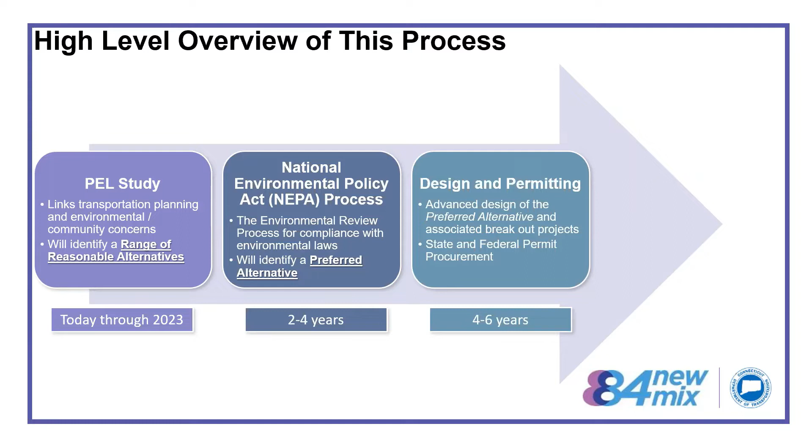Through that process, we will identify a preferred alternative. That is about 2 to 4 years. After we identify that preferred alternative, we can get into the design and permitting process, where we have advanced design of the preferred alternative and procure state and federal permits. That's about a 4 to 6 year process for the long-term project.

And then finally, construction is anticipated to be completed in 2045. The construction, as mentioned before, is broken down into phases, and we'll explain that again in the next couple of slides. That construction is anticipated to be completed in 2045, and that would be for the long-term project for the new mix.

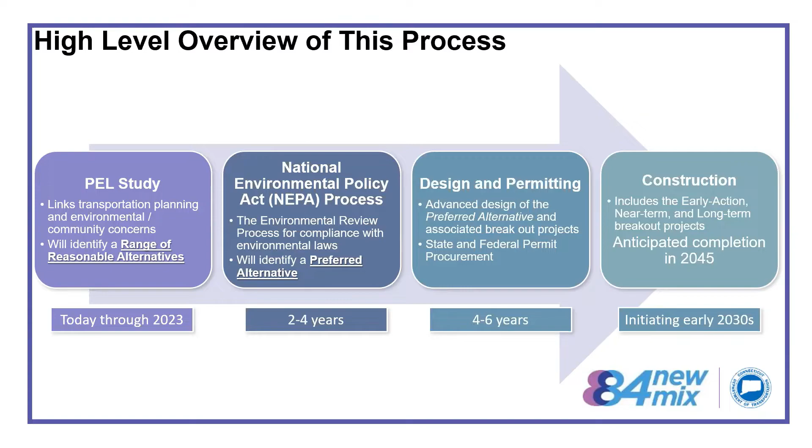I do want to stress that public involvement will occur throughout all phases. We are just now in this very early PEL study process, but each step of these phases will include and incorporate public involvement, public information meetings, where members of the public will be able to provide additional input and perspective on the preferred alternative or the design and other aspects of the project whenever it's identified. And with that, I'll hand it over to Jake.

All right, thanks, Naomi. Let me jump to the next slide. So we're going to be talking about today mainly the proposed early action projects. These are the enabling type of projects that will help improve local connectivity, improve traffic conditions on not only the local roadway network, but as well as the highway network. They're independent type projects that we've identified, and I'll explain how we came up with those, that we can initiate and start well in advance of the long-term timeline of the full replacement.

It's going to help enable, as I said, these are enabling projects, but propel and make the full construction easier. And as a reminder, what we're talking about amongst all these three is the near-term projects become those projects that we can do in advance, but the NEPA process has to be completed before we can move those forward into construction. Obviously, the long-term project is a full-blown replacement of the full interchange system.

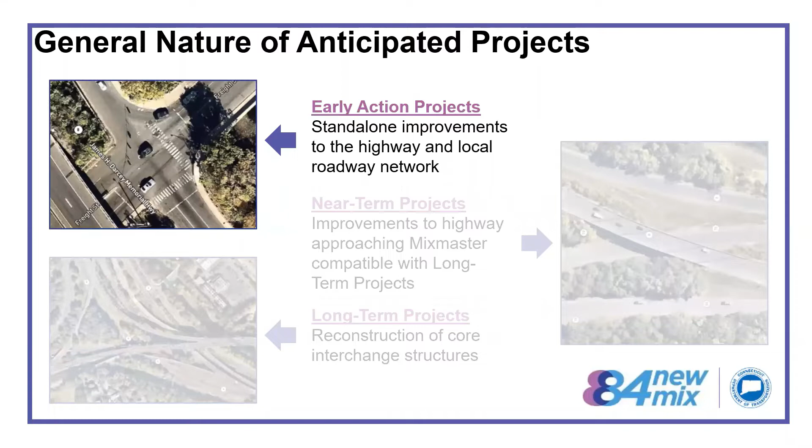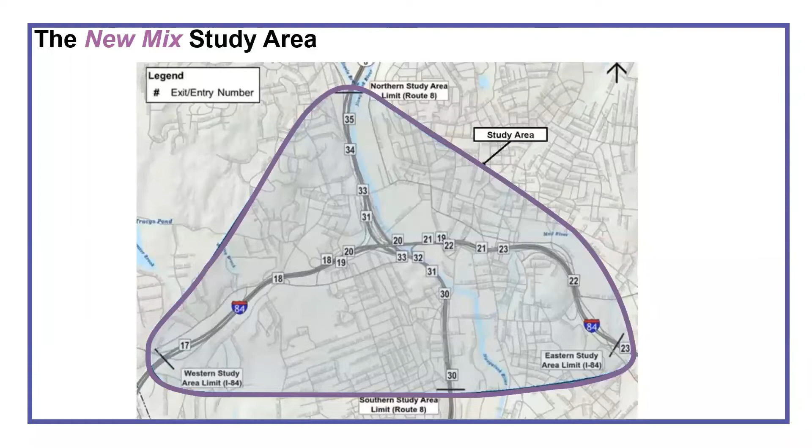So let's talk about how we arrived at the opportunities for these standalone early action type projects. We looked at the entire study network. We evaluated the traffic and saw that 35% of the volumes were jumping on and off the highway, not exactly the way the system was originally designed for. But we also looked at the roadway network, the local roadway network, and the arterials leading in and out of the highway as well.

So they created this hotspot map. You can see from the legend on the side that color-coded in green meant that things were functioning well. If they were that dark red, functioning at a level of service of F or E, anything in red or orange were areas of concern, areas that we felt we could make improvements. So we started looking at the potential solutions and the value these would bring to the overall interchange and a way to propel the project forward and help enable the long-term reconstruction of the interchange.

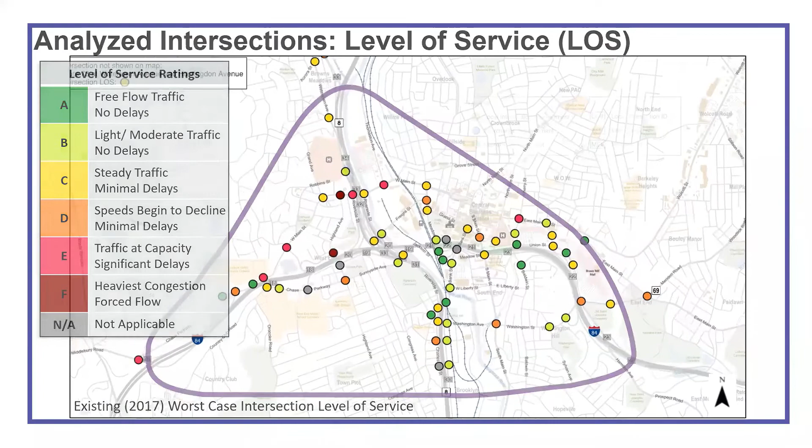So we broke them into 3 categories: the local intersection improvements, the interchange improvements, and the main line improvements that we saw as great opportunities as standalone projects that could be incorporated, some as early as today, but they're all in a very short, near-term time frame. We don't have to wait for NEPA to be completed. They're good standalone projects, and we can move forward with these. So David's going to walk you through these in a little bit of detail about each one. I'll turn it over to David Schweitzer.

Thank you, Jake. All right, the first one we're going to talk about, well actually the first two that we're going to talk about are actually getting included within the rehab project.

The first one we're going to talk about is ML5. This is a mainline improvement that happened to be numbered number 5. I believe Ken had brought this up at a previous PAC meeting and we started to discuss it. This is an auxiliary lane on I-84 westbound from the exit 22 on-ramp to the exit 21 off-ramp.

On this slide, you can see the exit 22 on-ramp is to the right side of our screen, while on the left side is the exit 21 off-ramp. I-84 westbound is on the upper half of the slide, while eastbound is on the lower half. The area shown in yellow is the area we'll be looking to reconstruct to put in this lane coming on in westbound.

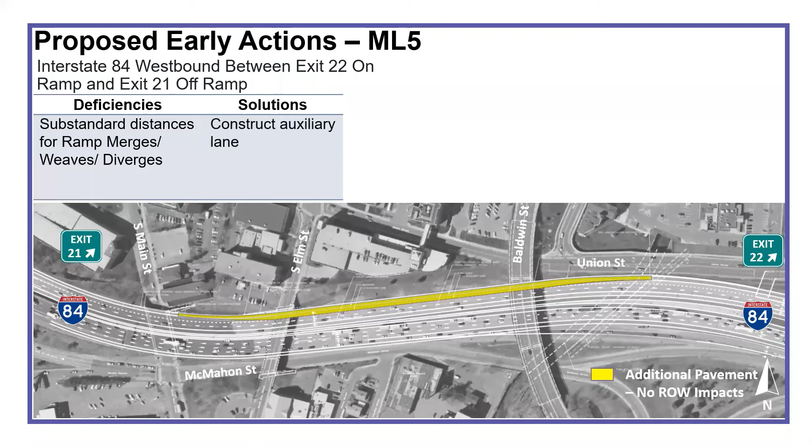This can slow things up during peak hours. So the solution is we'd construct that auxiliary lane, and that will help improve our traffic operations. We'll improve air quality because we'll reduce congestion, and improve safety because we'll reduce the crash rate. It's a low impact solution, and we looked to include this within the rehab project because it was an effective and efficient way to get this project built for the immediate effects it could show, since we already had such a large contractor on site, and this is within the area of the rehab project.

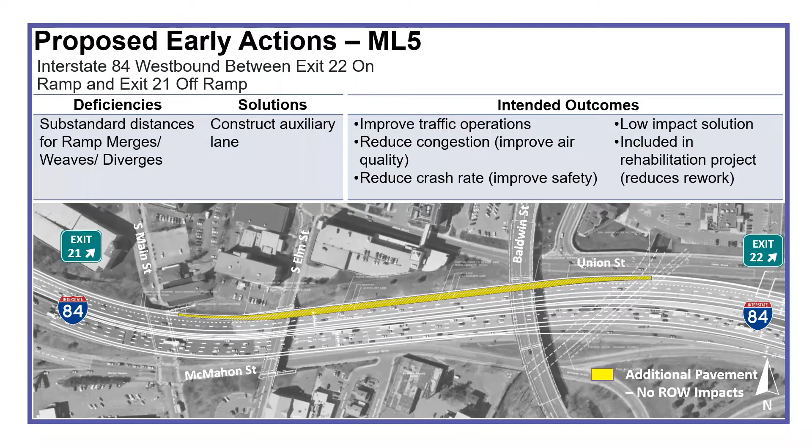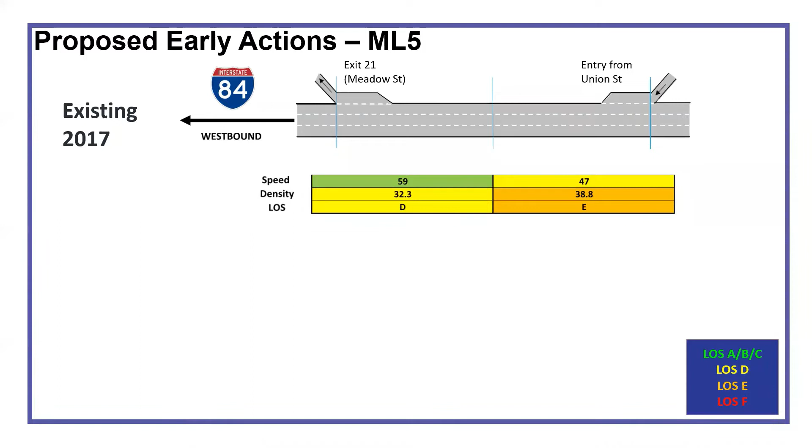What we were seeing was that the merge condition from exit 22, a heavy use on-ramp, is showing us a level of service E. But with these improvements, by extending that auxiliary lane, we're moving this whole stretch up into a level of service C. So that was the goal of this project, to help reduce that congestion along I-84 westbound.

So are there any questions or comments on this proposed early action?

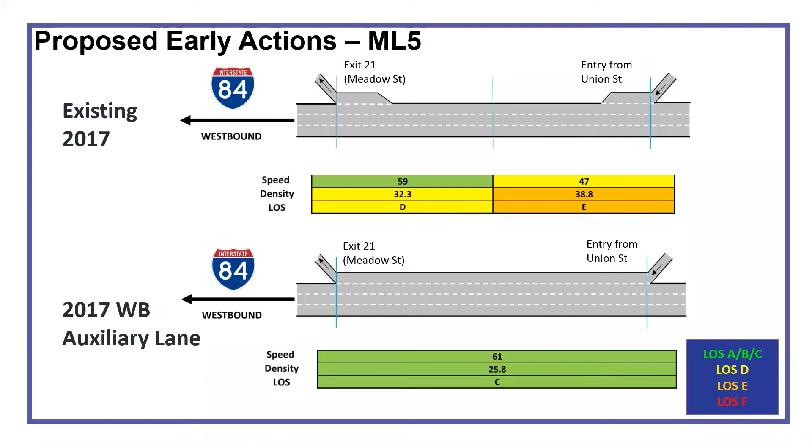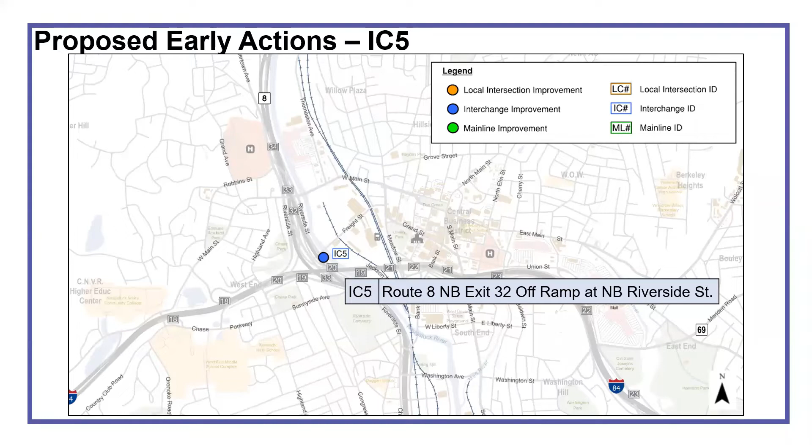The next one is what we called IC5, or interchange improvement number 5. This one also is going to go into the ongoing rehab project, and I'll explain why in a minute. This is the Route 8 northbound exit 32 off-ramp at its intersection with Riverside Street northbound.

As the rehab project has been going on, the temporary bypass for Route 8 northbound, when it crossed the Naugatuck River and came back, actually got within the footprint of Riverside Street northbound before it came back up and re-intersected with Route 8 northbound after crossing Freight Street. So we had to close the exit 32 off-ramp for the last several years. This was scheduled to be reconstructed by the contractor once Route 8 northbound was reopened. So that's the stage we are at.

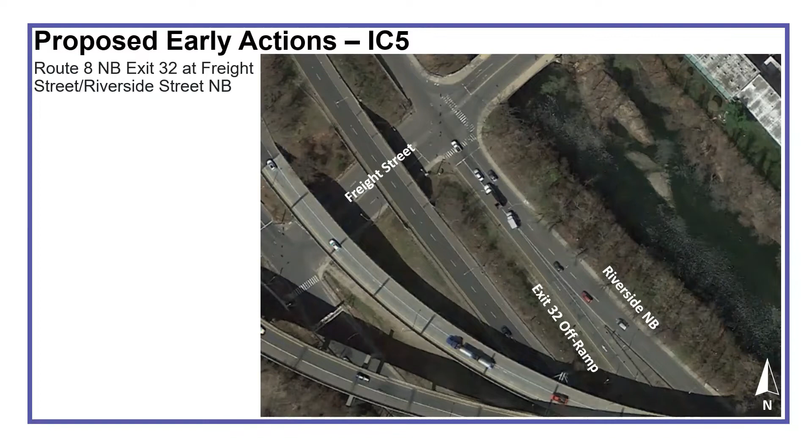But our traffic analysis showed us that we had a high crash location and deficient traffic operations that would actually affect West Main Street. If you look at the top picture, you can see how tight this gore area is to the existing Freight Street intersection.

What is happening is that vehicles exiting off of exit 32 are in a yield condition while Riverside Street northbound is in a free flow condition. So somebody getting off the exit ramp has to maneuver hard in order to, in this short distance, get to the far right lane to turn onto Freight Street.

And this is evident when you look at the bottom picture where you can see these cars already starting to move across the gore area in order to be able to start moving over to that far right lane.

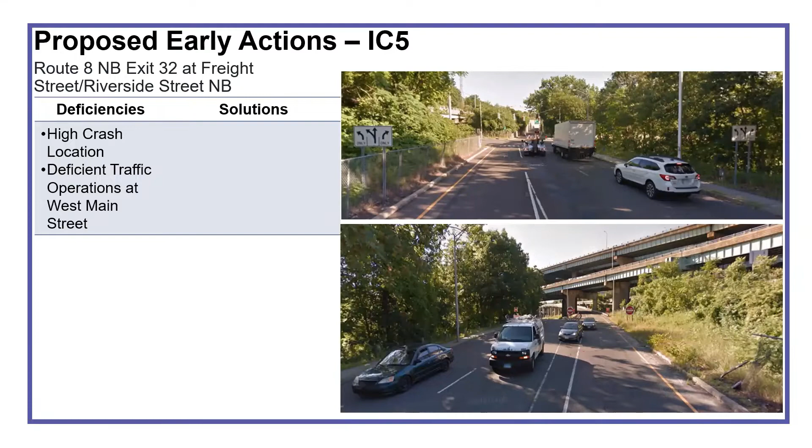So the solution we are looking at here is, there are already traffic signals installed at the intersections of Freight Street with Riverside Street, both northbound and southbound. Those signals are being replaced with the rehab project with a new controller and all new equipment.

So what we are looking to do is get a third signal installed, run off the same controller and synchronized with them at the intersection of the off-ramp with Riverside Street northbound. Then vehicles exiting from Route 8 northbound will be able to get into the lane they want and make the maneuvers they want, rather than being trapped and forced to head further north up to West Main Street, which is already a very heavily trafficked arterial within the city.

So what our outcomes will be is we're going to relieve that pressure on West Main Street, take some of it off, and improve our traffic operations here in this area. When we reduce congestion, we're improving air quality, and when we reduce the crash rates, we're improving safety. This is also a low impact solution.

We did not want to have the rehab contractor finish his work, then identify this problem and come back four years later and start to tear the same intersection up. So we wanted to get that work done now within the rehab project. The rehab contractor is also going to be reconstructing all the sidewalks and crosswalks throughout this area.

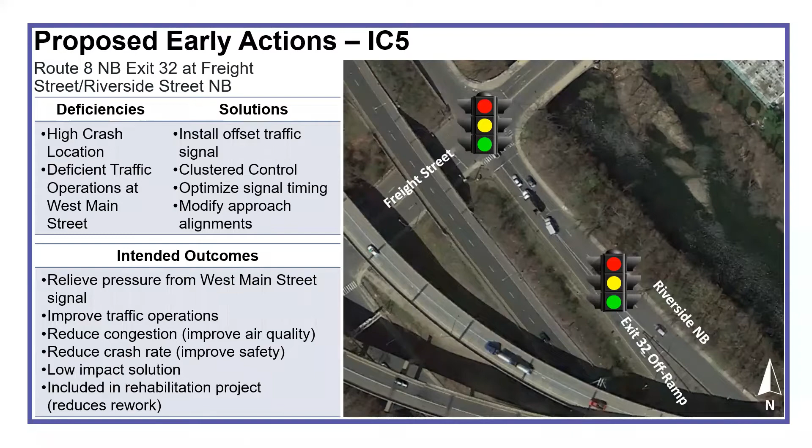Now, those previous two were projects that have been realized, initiated, and moved forward with the rehab project. These next four are ones that we are in the report or study phase of, and they are going to follow the ConnDOT process, meaning they will be looked at with other opportunities for public meetings so these can be commented on in the future. So the first one we're going to look at is LC1, a local intersection improvement, which is at West Main Street and Highland Avenue.

As we had mentioned previously, West Main Street is a heavy arterial with traffic in Waterbury. It sits on the north end, the arterial we've spoken about previously. We have four crossings of the Naugatuck River between Washington, Bank, Freight, and West Main Street. But West Main Street is the only one that continues in an east-west direction and climbs that ridge line on the west side, which is where we're looking right now.

So if we look at the intersection with Highland Avenue, Highland Avenue comes down and is at a stop condition at this T intersection, while West Main Street is in a free flow condition. Now, a lot of these pavement markings are faded here, and the crosswalks are faded. So we have a high crash location. People aren't sure where they should be. We also have poor intersection sight distance.

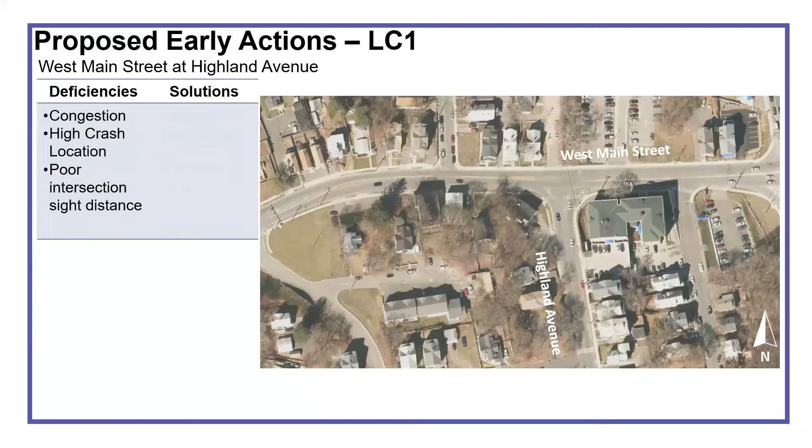So the solution here is we look to install a new traffic signal, coordinated with others through this West Main Street corridor. As you can see right off to the right edge of our screen, this is right where the intersection with southbound Watertown Avenue and southbound Riverside Street is. So what we look to do is install that new traffic signal here, restripe our approaches so we get some of those dedicated turn and through lanes.

And then with that signal coordinated, we're also going to be able to have protected pedestrian phases, so people will have a good chance to cross West Main Street and Highland in a protected crosswalk. And we'll refurbish or rebuild a lot of these sidewalks, and extend them further south to fill in a few missing gaps that are out there.

So again, what this will do is help improve traffic operations, improve air quality by reducing congestion, and improve safety by reducing that crash rate. This one here will also improve connectivity and non-motorized mobility, because we'll then have those protected pedestrian phases. And again, this is viewed as a low impact solution.

Any questions or comments on this proposed early action?

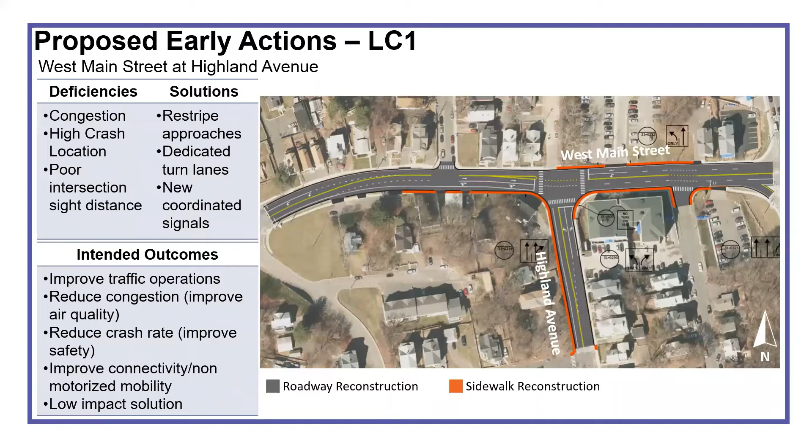All right, we'll move to the next one. Our next one is another local intersection improvement, at the intersection of Chase Parkway and Sunnyside, where it transitions to Sunnyside Avenue at its intersection with Highland Avenue. If we zoom in, this sits in the southwest quadrant away from the core of the interchange, with a lot of on and off ramps coming from I-84 in the immediate vicinity, and then we have this four-way intersection that sits just off from this.

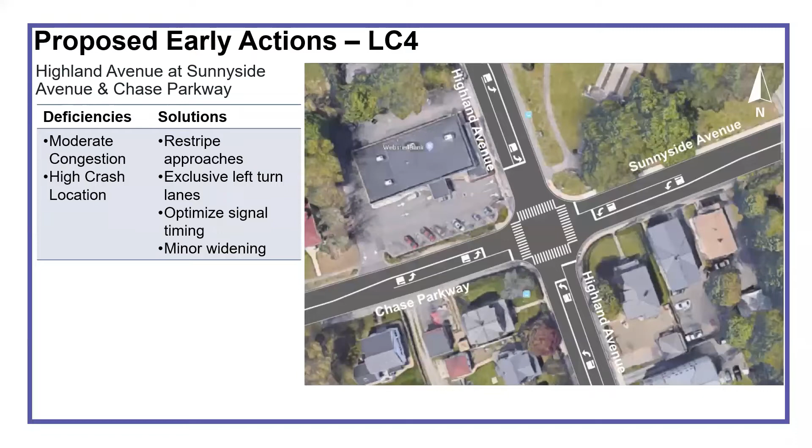This is identified as an area with moderate congestion, but it is a high crash location. Pavement markings are somewhat faded, and there's an existing traffic signal out there. Chase Park is off to the right here, and we also have high schools and other schools to the south and west. So what we look to do here is restripe these approaches to get dedicated left turn lanes at the intersection to help with safety and congestion, optimize the timing of the signal, and look at some minor strip widening along Highland Avenue to the south to accommodate this.

Again, what are the intended outcomes? We're going to improve the traffic operations, improve our air quality by reducing congestion, improve safety by reducing the crash rate, and improve connectivity and non-motorized mobility with this project. So are there any questions, comments?

Dave, it's Bob in Waterbury. I think that's a great improvement, but a little further down Chase Parkway, heading west, there's the on-ramp to eastbound 84. On Chase Parkway the traffic backs up, particularly during school time, where people continuing through on Chase Avenue can't—they're blocked. I'm wondering, right where the green circle is there, if there was consideration given to an exclusive left turn so as to allow through traffic on Chase to bypass.

The blockage is considerable. Yeah, this is an area that has been brought forward to us, and it was identified. It's not part of the presentation today, but it is one that is being looked at as a possible proposed early action. Okay, great.

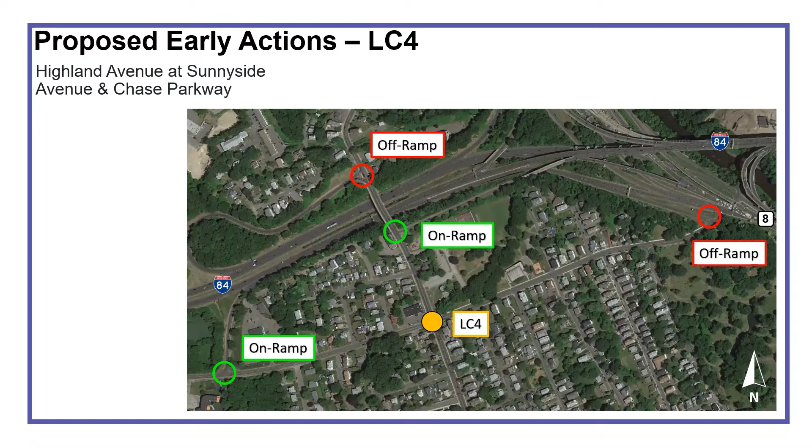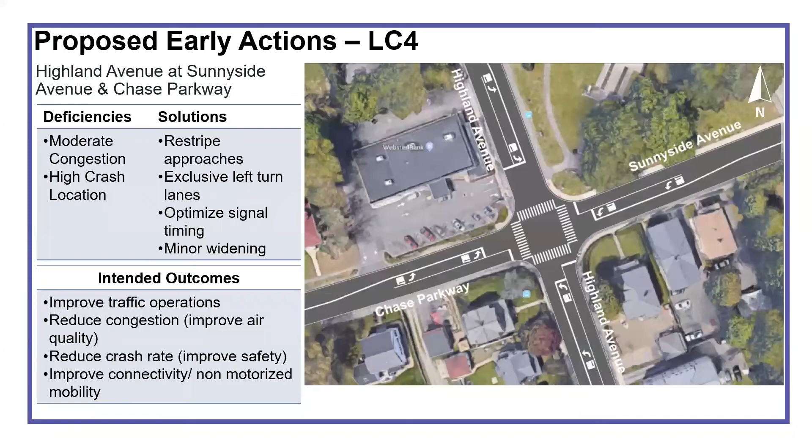All right, we'll move forward. The next two are a little complex, so if something comes up or you have a question, don't be afraid to interrupt me—be glad to answer your question. This one is an interchange improvement, at Watertown Avenue, West Main Street, and Robbins Street, in the northern part of the city.

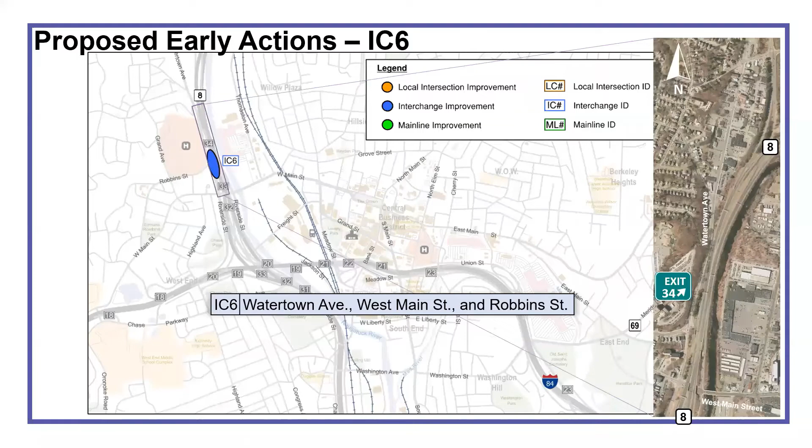As we zoom in, this actually came out of looking at the intersections of West Main Street, where the one-way pairs of Riverside and Watertown—their names changed—but their intersections at West Main Street really cause a lot of congestion along West Main Street. So in order to improve that traffic flow, we were looking at what could be done at those intersections to help improve traffic flow and the other conditions we've been looking at.

Just to orient everybody, as we turned in on this we rotated, so now north is directly off to our left. That's Route 8 cutting through the slide here. West Main Street is running up and down on the right side, and that's Route 73 heading to Watertown, up in the upper left-hand corner. Watertown Avenue is coming across through the middle there.

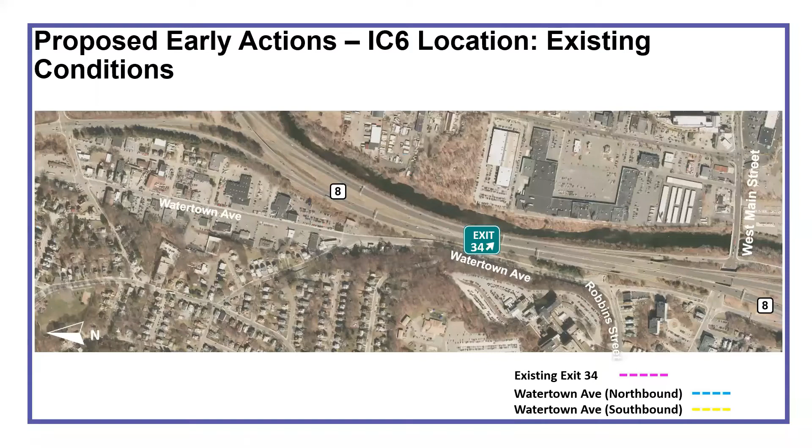So what this really identified when we looked at this problem is we had high crash locations and deficient traffic operations at West Main Street. A lot of this was at the intersection with southbound Watertown Avenue, where the existing exit 34 off-ramp came off. So this existing condition gave us two southbound approaches to our intersection.

So our traffic signal had to control both of those phases separately. They couldn't go at the same time. So that really slowed the timing of the intersection and led to a lot of congestion there.

Looking at some of the other factors, the intersection with Robbins Street and Watertown was also a bit of a concern, because we thought it could be configured better. As Watertown Avenue northbound transitioned from Riverside Street northbound, it's on the east side of Route 8. It carries further up and then crosses over underneath Route 8 before it reconnects, and Watertown Avenue becomes bidirectional as it heads further north.

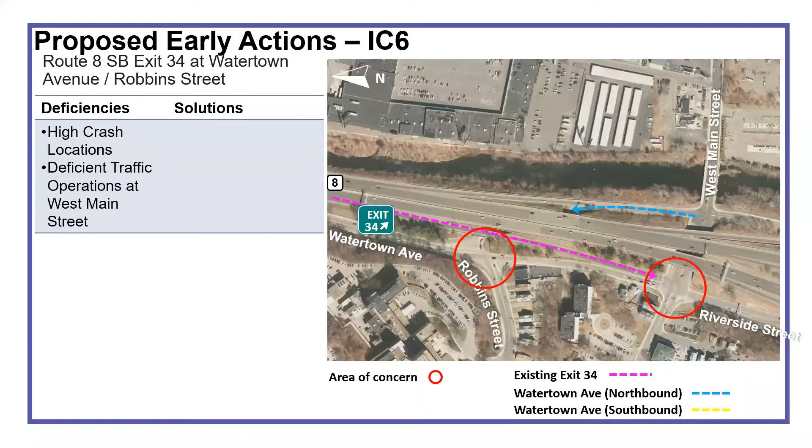So the solution we were looking at really came down to wanting to move the exit ramp from Route 8 southbound, the exit 34 off-ramp, from the West Main intersection back to the Robbins Street intersection.

What needed to be accomplished then is we would need to remove Watertown Avenue northbound as a separate roadway, bring that underneath West Main Street, and make that section of Watertown Avenue between West Main Street and Robbins Street bidirectional. So then we'd have a four-way intersection at Watertown Avenue and Robbins, along with the exit 34 off-ramp, and a simpler intersection with West Main Street and Watertown Avenue.

Any questions on that? And signalized? Oh, definitely, Bob. Yeah, both of those would be signalized. Sorry, I didn't get there yet. Yep, new coordinated signals even. So thank you.

So what we'd be looking at is we'd improve our traffic operations. We'd improve our air quality by reducing congestion, especially along West Main Street, which will help that area flow better. It improves safety because it reduces that crash rate. And then also with that signal timing and some of the new sidewalks we're putting in, it helps improve connectivity and mobility for non-motorized users.

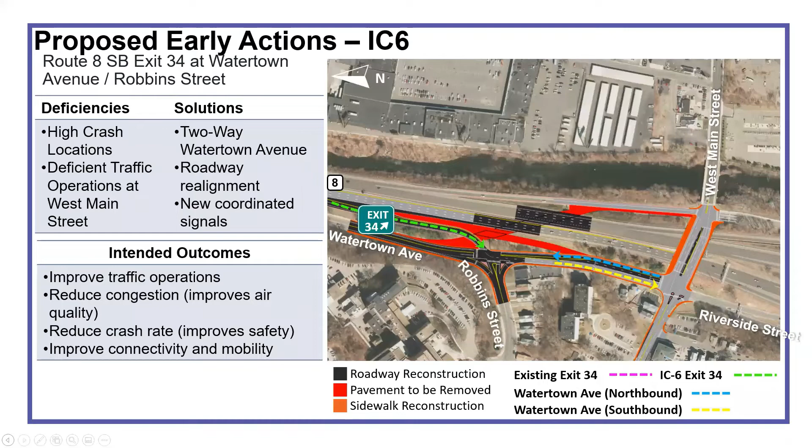So I'll pause again here to see if there are any further questions on this one. All right.

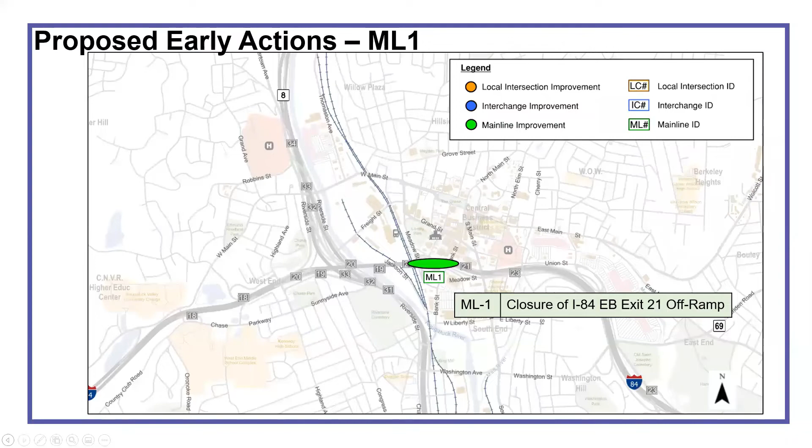We'll go to this last one. I know people have heard this talked about. This is the elimination of I-84 eastbound exit 21 off-ramp. That off-ramp has been temporarily closed for quite a while now, and we're actually looking at the possible elimination of this in the future. That's part of what this proposed early action project is about. But I want to get through the whole thing, because this really isn't just about I-84 eastbound.

That's where this started, but then this really got down into what else can be done if we're going to be moving that traffic over to exit 22 - what takes place at the local level, not just as far as traffic goes, but what are the other opportunities as far as urban design also. So this is a multi-level early action project as we get through this.

First, to give a little background, we had a bridge that was in poor condition, and that's the exit 21 bridge - that hook there. It was due for a rehab, but we were going to have it closed due to the construction on the rehab project.

As we started looking at this further, you realize that we have very poor distances for the merges, weaves, and diverges, because we have that Route 8 northbound on-ramp, the system movement, which is a heavy movement coming on. And then we have that short auxiliary lane, which is only providing like 350 feet for these merges, weaves, and diverges. Exit 22 is sitting an additional 700 feet to the east.

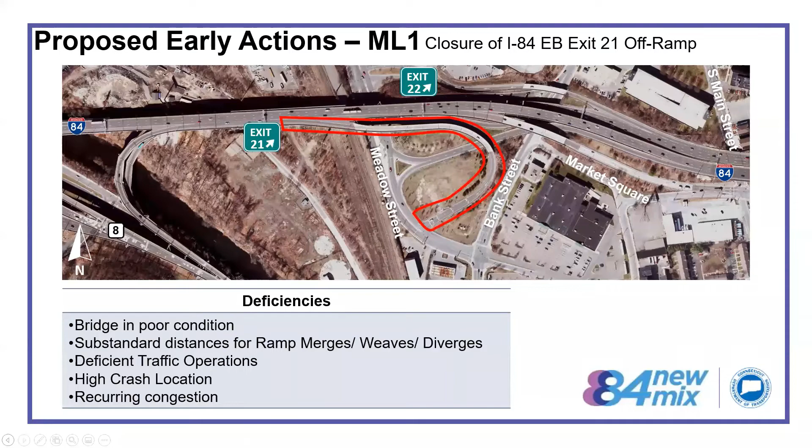But by 2045, we want to have this interchange replaced. So we're looking at, if we're not in very good shape now and having all these problems, and in 2045 we're a hard fail, where is that year in between where we're going to really experience problems, where the city, the community, the commuters, the region, everybody could start to see the benefit of this project? As we ran our analysis and worked through the models, we realized 2031 was really the year we'd start to see where there were issues. So that's how we arrived at that year for our analysis.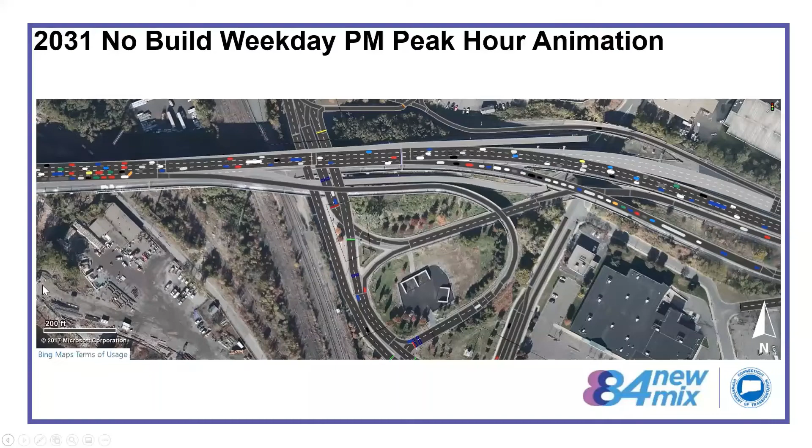So going forward, the thing we looked at was: if we eliminate exit 21 and force people to exit 22, and they need to travel on the local grid network, on the local roadway network, how long is it going to take them to reach the destinations they wanted to reach? Because if you look at what we've highlighted here, it's the train station.

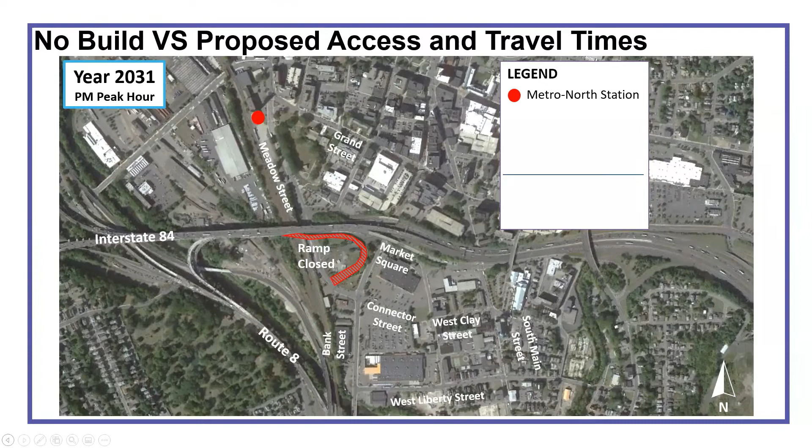So if we were to get off of exit 21 in a no-build condition, we're looking at that travel time on the local roads, this is showing a couple minutes. If we were to get off of exit 22 and try to get over to the train station, heading north and coming across Grand, we're looking at traveling basically 4.5 minutes. So where is this time savings?

What we needed to do then is look at I-84 eastbound, and we go from a common starting point. In this case, we picked exit 20. So you look at your travel time along I-84, your travel time on the exit ramp, and then your travel time on the local roads, versus if we eliminate exit 21 and take you to exit 22. Then you total up your cumulative times. You can see about a 2 minute savings in travel time, because with these improvements in I-84, with less traffic and less congestion, you're actually having a savings of 2 minutes.

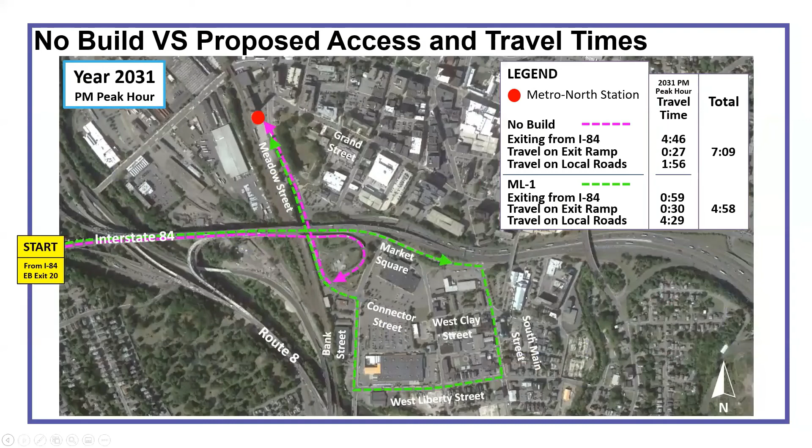Getting back into this, knowing people could travel north or south, we looked at that as being our study area—from Meadow and Bank on the west side, to Grand on the north, to South Main on the east, and to Liberty in the south.

We looked at those intersections and how they rated today in the no-build condition, and then what their level of service or proposed condition would be in 2045.

The only one failing is the South Main Street and Union Street intersection in the future, but that's currently undergoing a CMAQ project, which deals with air quality—that's why that traffic signal is being replaced today. I'm told the bids just came out.

So within this area, there are 9 signalized intersections not covered by that other project. With those 9, we'd be looking to replace those traffic signals and make other improvements at those intersections.

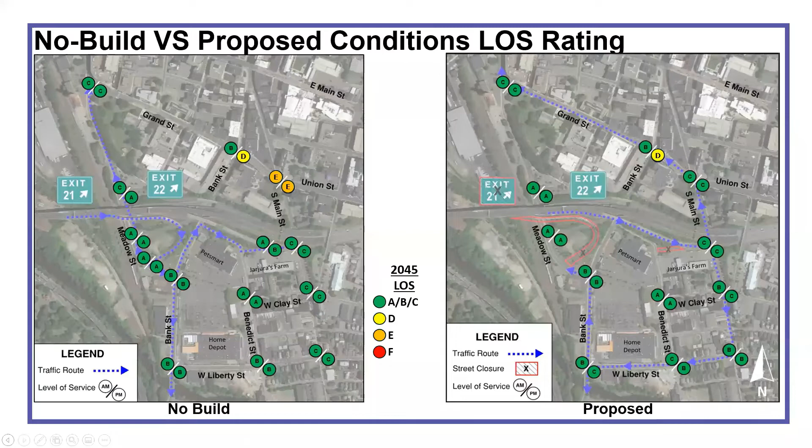What that comes down to—I'm showing here an example, South Main and West Clay—is what those intersection improvement details would be.

It would include new traffic signals, signal phasing and timing improvements, new lane striping or dedicated lanes at some locations, new pavement markings, and quite a few would get LPIs—leading pedestrian intervals—which give pedestrians a head start into the crosswalk to help them cross in a protected fashion.

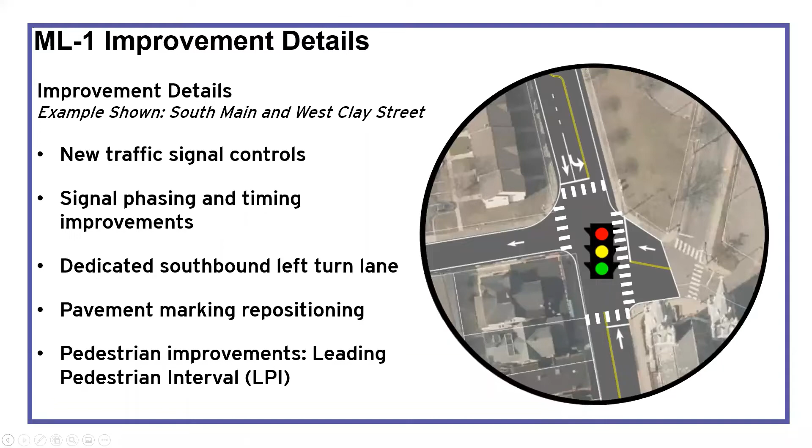That covers the improvements at these intersections on the local level. We also looked at urban design opportunities at all the intersections along that path—Meadow to Bank, Liberty to Grand, and South Main to the east.

We want to show an example along South Main, where we had 3 good examples of what can take place: shown in light blue are underpass improvements, in green a more commercial type roadway, and a third section that was more small business/residential type area where we could also do roadway improvements.

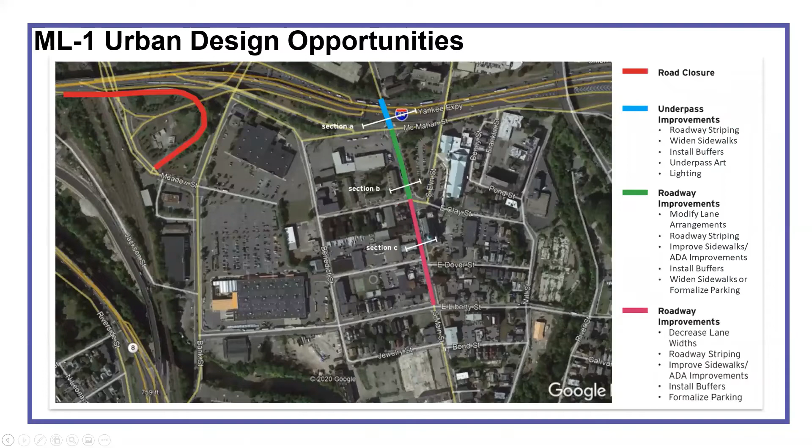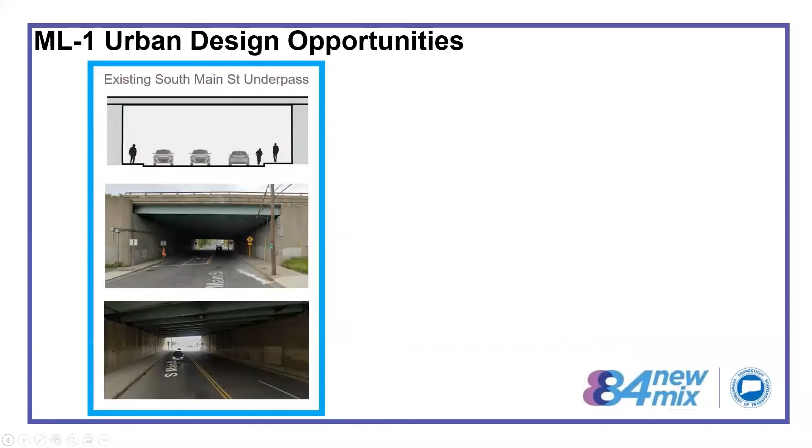Starting with the underpass improvements—looking at that existing underpass on South Main, it's dark and not very inviting. So one of the first things we look to do is improve the lighting there, combined with other safe routes tactics, to get something more inviting and welcoming for pedestrians to utilize this underpass.

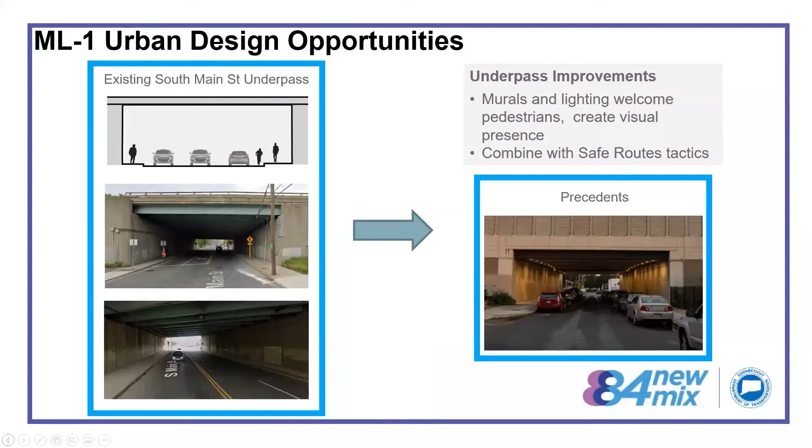The next one we're looking at is a section between McMahon Street heading south to Clay Street. This is a very wide swath of pavement, 45 feet curb to curb. Currently there's parking along the west edge, even though it's signed that there shouldn't be parking here, and this is in front of those condos.

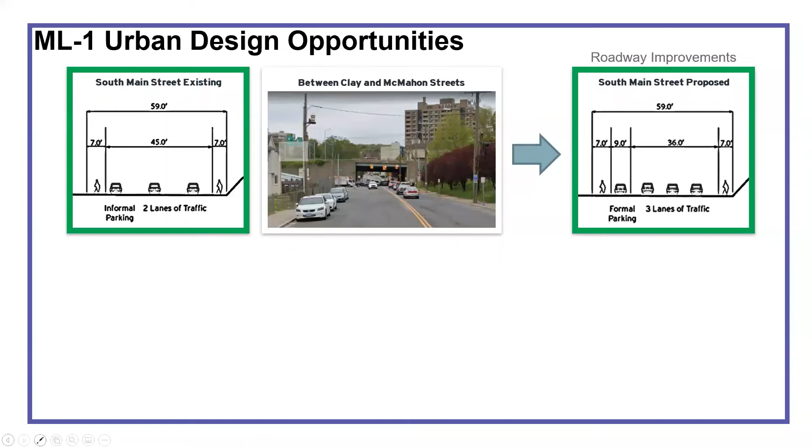What we look to do here with our section is maintain those nice 7-foot wide sidewalks we have. We look to formalize that parking on the west side, and then structure those lanes. Presently it's just separated by a yellow stripe for northbound and southbound. We look to get 3 lanes as needed, since we'd have turn lanes at both of the signals at either end of this.

The next section, further to the south, is from Clay heading south towards Liberty. This is more in the residential small business area, a much narrower street, reduced in width to 34 feet. Our section shows informal parking on both sides of the street, leaving narrower travel lanes through the center.

If you look at the picture, you can see how with parking on both sides, cars are crowding that yellow center line to get through. So our proposed improvements would be to maintain those 8 and 10 foot wide sidewalks we have, formalize the parking on one side of the roadway, get 2 travel lanes through here, and provide a buffer on the other side.

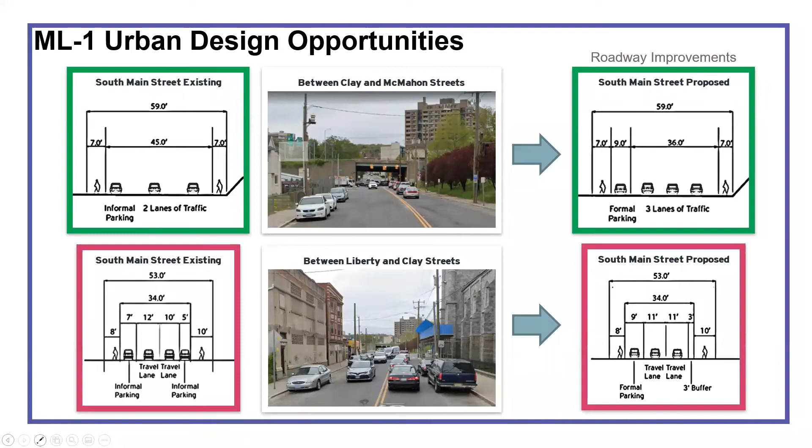So those are just some of the urban design opportunities. We just showed South Main, but we look to carry it throughout that whole grid as we went through.

So to summarize this project: we have a bridge that's in poor condition, very substandard distances for ramp merges, weaves, and diverges on I-84 eastbound. We're showing deficient traffic operations, high crash locations, and recurring congestion, which is even more highlighted once we showed that travel time analysis. You can really start to see how that congestion is there.

Part of these solutions would be demolition of that existing exit 21 bridge, opening up a little more space. There's been talk of a possible commuter parking lot or other overflow parking, or other ideas that could take place in that open area.

We look at new traffic control signals at 9 of the intersections throughout this grid, signal phasing and timing improvements, and there'd be other local roadway improvements.

Our intended outcomes are to improve traffic operations, improve air quality by reducing congestion, improve safety by reducing crash rates, and improve connectivity and non-motorized mobility. We do a lot to improve that. And then we have a lot of urban design opportunities here, which would hit way down, get us down at the local level.

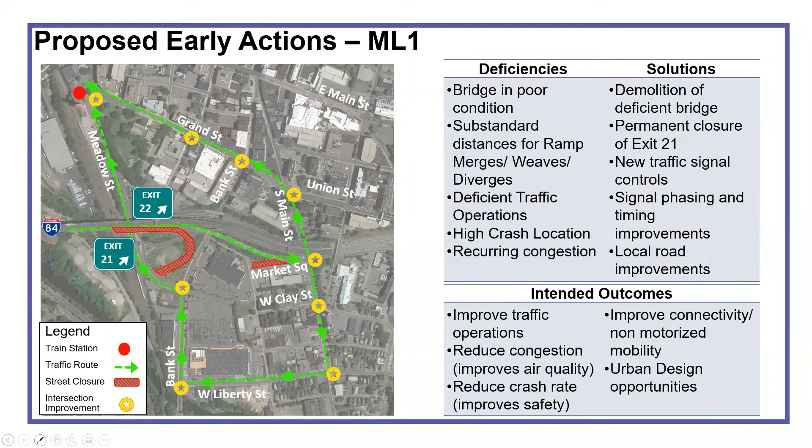All right, on to our next slide. Again, like I said, those first two projects we talked about are within the rehab project, so those are going to be under construction. These last four that we talked about are in the study phase.

Reports are being produced on these, and then they'll be advanced through the ConnDOT project process, meaning we'll have other public meetings on these. There will be a lot of other opportunities for the public to get engaged and ask questions on those projects. We've initiated those projects so that we're getting close to the environmental studies after our reports are done, so these projects can be designed and put out on the street, looking to be constructed later in the 20s and into the early 30s.

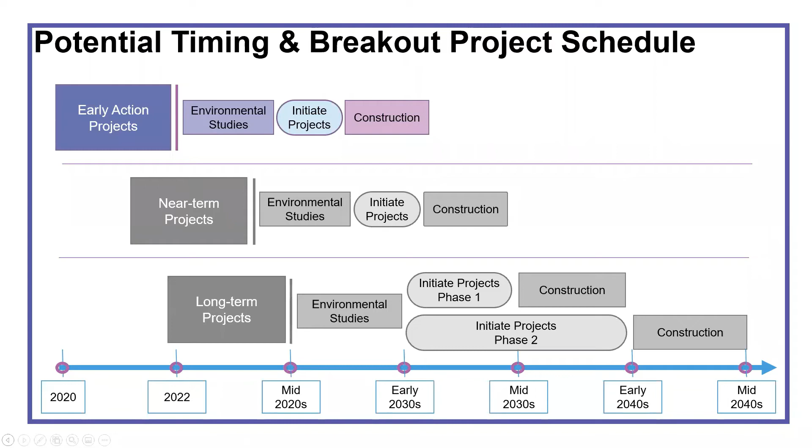I think our next slide is just showing a recap. These are the 6 that we talked about today. Bob mentioned another one we've been alerted to, and we'll take another harder look at to see where that fits within our early action projects. Again, the 2 here, IC5, that interchange improvement, and ML5, that mainline improvement, are under construction with the rehab project.

I don't know if anybody has any further questions, comments, or feedback.

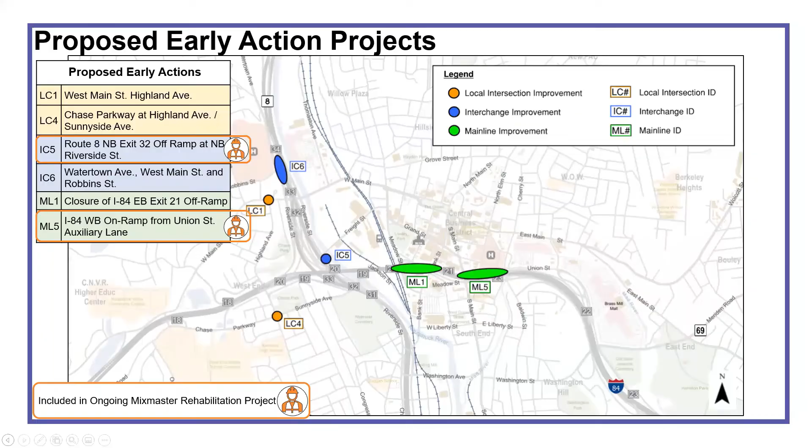Okay, thank you. So, next steps. Today's meeting was a little bit out of our normal PEL study process, as we were going through our early action projects that can be mobilized more quickly, and they're standalone from our New Mix project. So they will have a separate NEPA and design process from this New Mix study, as David mentioned, where anyone can provide input whenever those projects get mobilized.

Here we are, our very trusty PEL process funnel. I just want to provide another overview of this process that we are going through in order to identify that range of reasonable alternatives, or those PEL recommendations. Each alternative that we've gone through with the universe will be screened based on our goals and objectives and purpose and needs and other guiding principles that we have developed.

Last meeting, 4A, we went through our proposed level 1 screening results through the fatal flaw identification to determine which alternatives do not meet the needs of our community and transportation system.

This next meeting, PAC 4C, will present the evaluation criteria for the alternatives that had advanced from level 1. We'll be evaluating the alternatives based on their ability to meet those intended outcomes of the project. We'll have more details available, and we'll be able to assess the alternatives' ability to meet those goals and objectives that we have been developing in conjunction with you all and members of the public and other stakeholders.

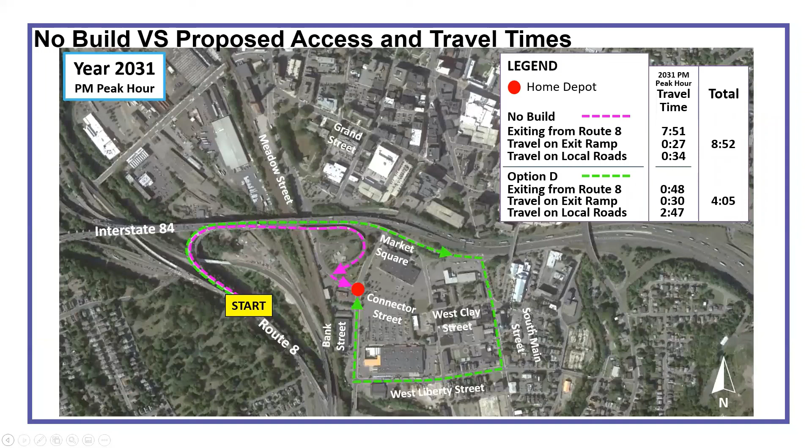I don't see any other questions or comments or raised hands in the chat, so I think we can adjourn a little early. I want to thank everyone for joining us today. I thought this was a really good presentation, and wanted to make sure you all had this information so you can see those enabling projects we've identified that can have immediate benefits to those of you using this interchange daily, commuting and for your day-to-day traveling.